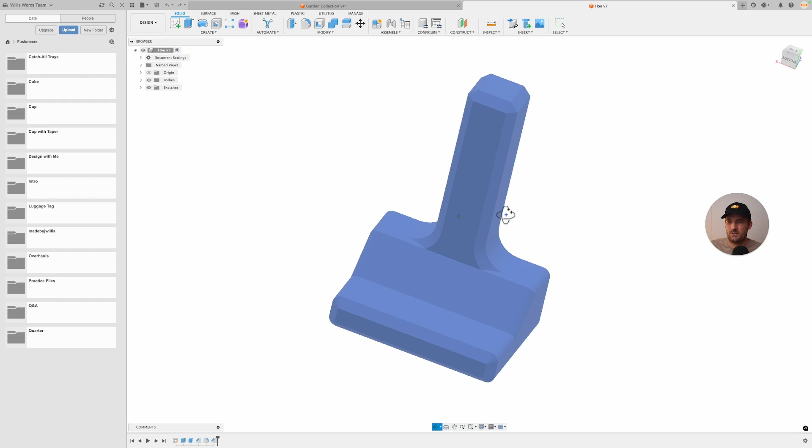Today we're going to be talking about how to design these garden hand tools. The first one we're going to design in this video is this hand hoe. So you can look at it from this perspective. It's optimized for 3D printing, which I'll talk about some as we design it, but this is what we'll be making, so let's go ahead and get started.

So if you've been following along with Fusioneers, this is our Fusioneers folder. So I'm going to go ahead and make a new folder, and it's going to say hand garden tools, and then open that up and then make a new file here. I'm going to do hand hoe. And so if you'll notice from the collection, these are pretty similar, really. We're just changing the kind of tool aspect of them.

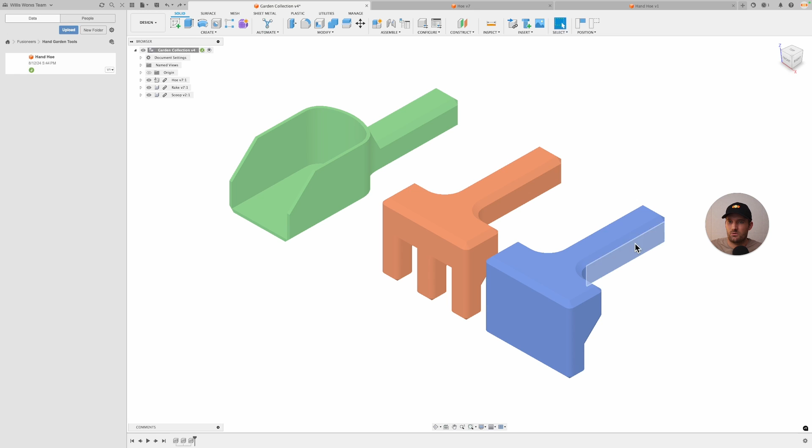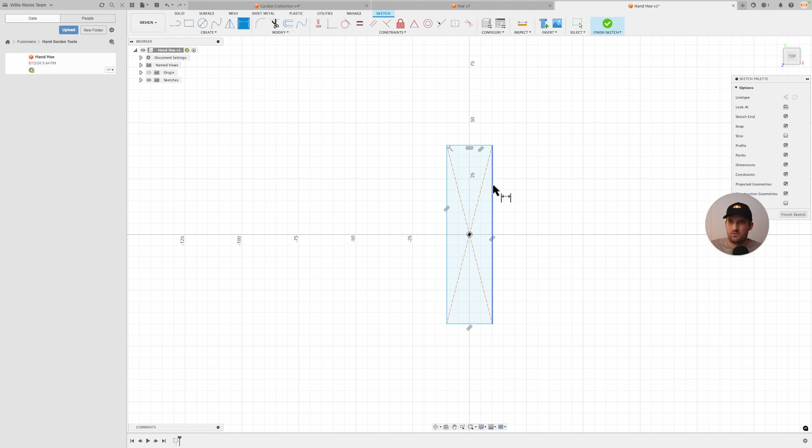So the first thing we need to do is to make a rectangle here. And I just need to remember how long I made this rectangle. So it's 110 millimeters from there to this flat surface. So let's go ahead and go back to the sketch, and then we'll start here. And we're going to create a rectangle. I'm just going to use the origin here. So it's 110 millimeters long. So I'm going to click D for dimension, make that 110.

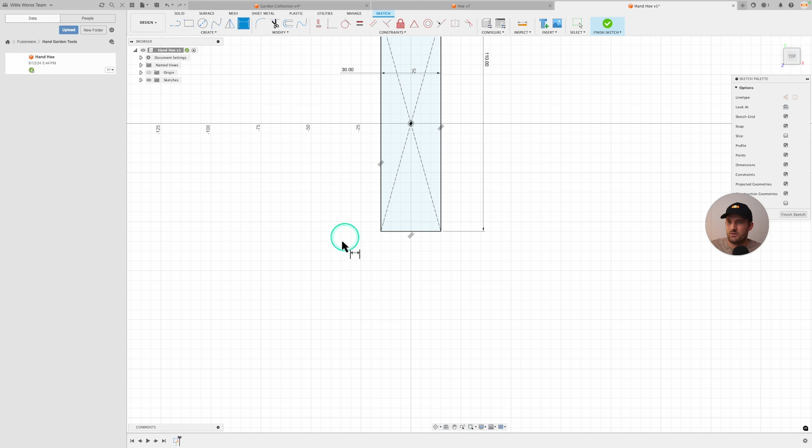And before I forget, I'll turn on my kind of highlighters here, and then I believe I made it 30 millimeters wide. Yeah, so 30 millimeters wide. So dimension with the D shortcut key, and then dimension it out to 30 millimeters. And then down here, we're going to make this using the R shortcut key, which is the 2-point rectangle. And then I think this is, maybe it's 40. Let's see. I'll need to go check that in a second as well.

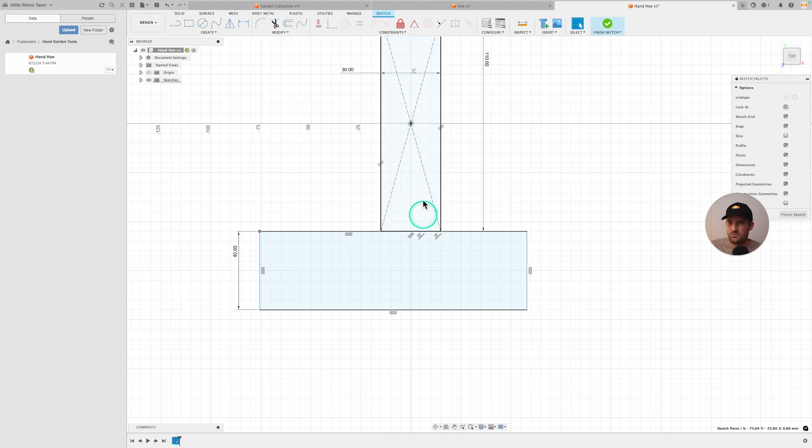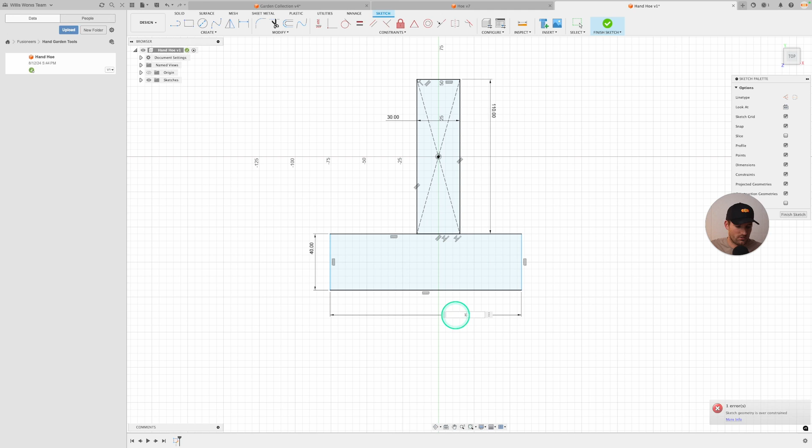We need to make this colinear with that line. And now the last thing to do is just to constrain it this way and also in space. So let's go back here to make sure that I do it the same as I did this one. And the reason I go back and forth is because I do a lot of guess and check when I'm making these. So this is 100 millimeters wide, and then let's see how thick it is. 40. Okay. So it's 40, we got that right. This is 100, 100. And then we want this in the center. So this is a little short.

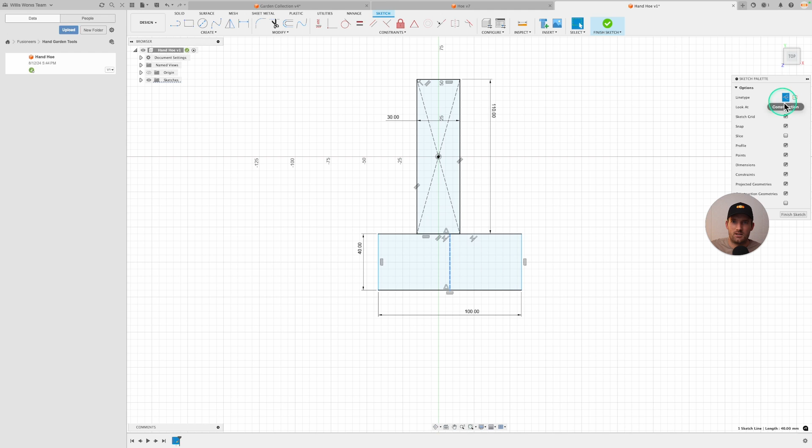This is a little trick that I like to do. If you just draw a straight line here, this is at the midpoint of these two lines. So now we know this is in the middle, and then we can make it a construction line by clicking on it and then click X, which is the construction line type. So it just alternates between construction and the regular line. And then you can select midpoint and then select this, and then click and hold, or you can make sure that the smaller rectangle line there is highlighted, and then it snaps to the midpoint of that. So now this is centered and symmetric on each side.

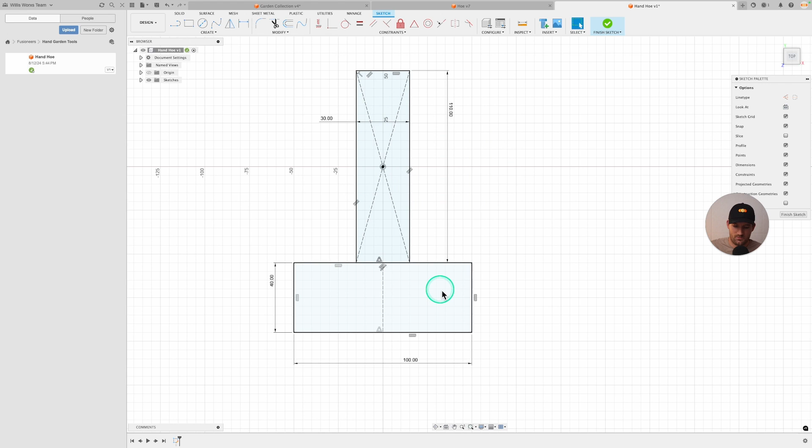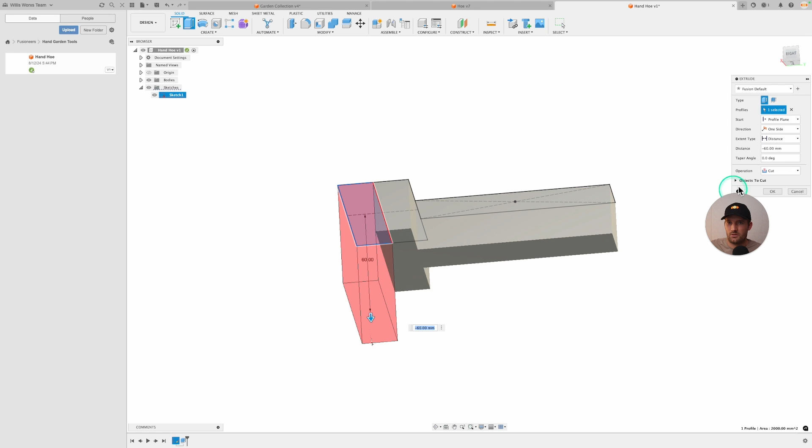Okay, so click finish sketch. That's all we're going to do for now. So actually we need to do one more thing. I forgot about this. So go back into the sketch, and then we're actually going to draw a straight line across the middle here. And that's going to be for our chamfer later. So now we can go ahead and extrude this out. So we're going to go -30. And then we're also going to go ahead and turn this back on and extrude this out a little bit further than 30. So we're going to click join. And then let's see, probably did about 70, so we need to check that as well. So it's 80 millimeters from there to there. So we just need to come back here, make sure we go 80 millimeters, so -80.

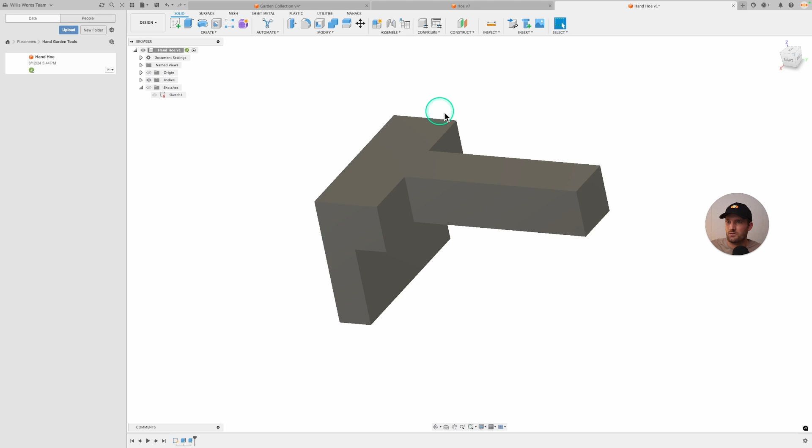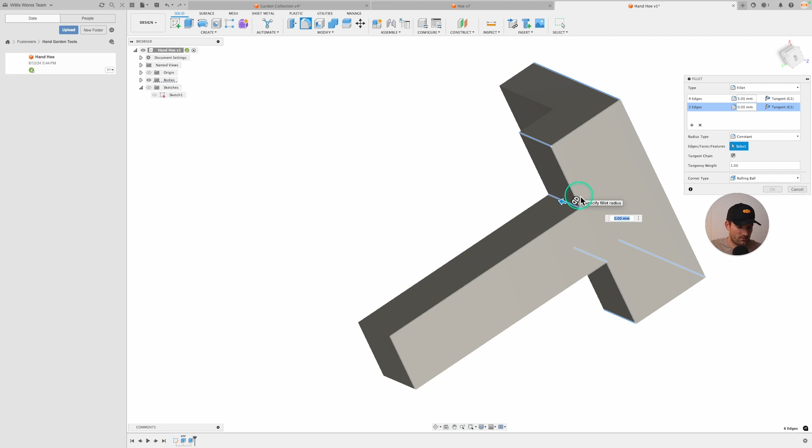Okay, and so this is the rough outline of it. Turn the sketch off, and now we can fillet the corners here. So this is going to be, I think I used 5 there. And then I might have used more in this corner, so I'm going to go ahead and add. And the reason I click add is this lets me make a different amount of fillet here. I want to say this one was maybe 15. So that looks pretty close. I'm going to click OK. And let's just check here before I go any further. So this one was 15. These were 5. So yeah, that looks pretty good.

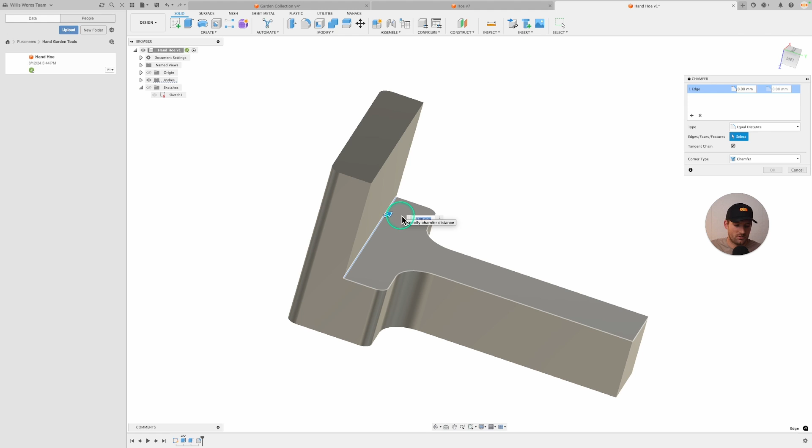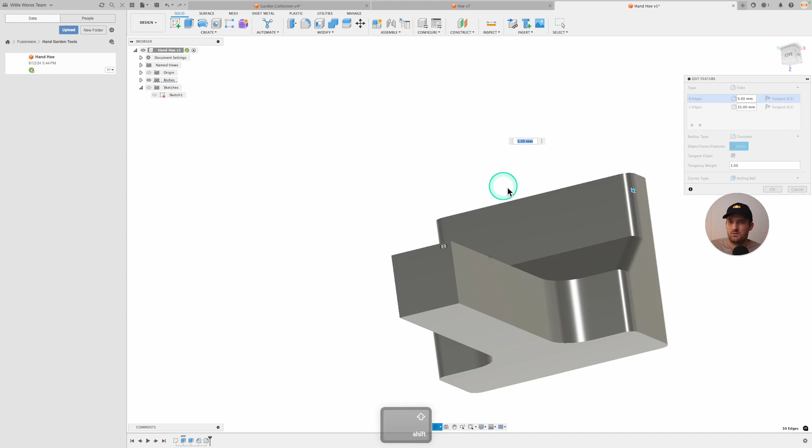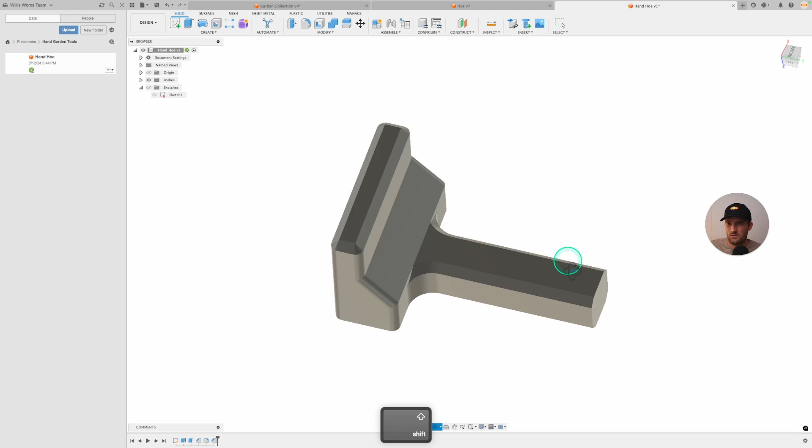Now we're just going to need to add this chamfer here. So modify chamfer, and then this is going to be 20 to make it all the way out there. And I actually want to go back in time here and then edit this feature. So now I'll put this behind. Actually, it's selecting the wrong one. So I want to make sure I have the 5 selected, and then that's going to fillet that, and then also this. And then click OK. And now we're going to do modify chamfer. And this is going to be 5 on each of these corners here, or edges. And so I think that's pretty close. Yes, we had that. Okay. So this is the hoe design.

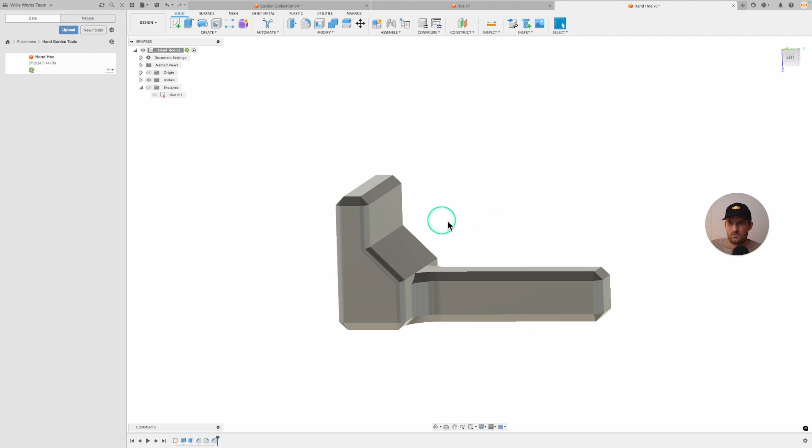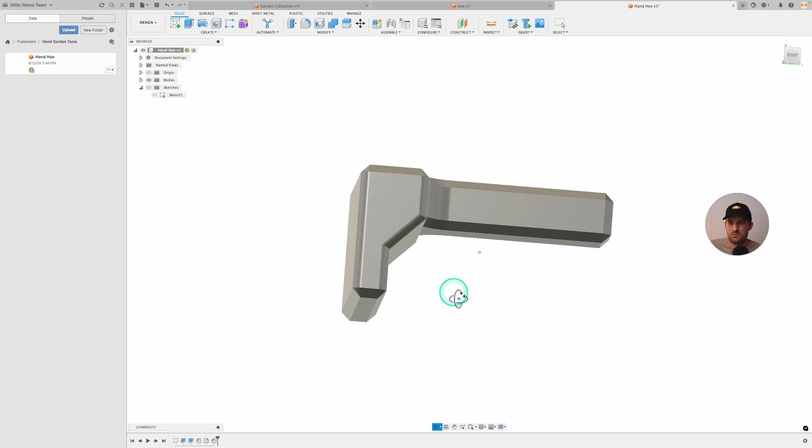One thing I did forget also is to just select this face, and that gives it a little nice end there. This is how I made the hoe, and the reason that I made it this way is obviously you could leave this off, but this gives it a lot of reinforcement. So if you're actually using this, this is a good practice file regardless of if you used it or not. But if you're using it, you can imagine there's a lot of kind of pressure or force here, and this really reinforces things. So this is just really for strength purposes. You could leave it off, but it'll create a pretty high stress point there in the 90-degree angle. So adding a chamfer like this really makes it a lot stronger. So this is the design.

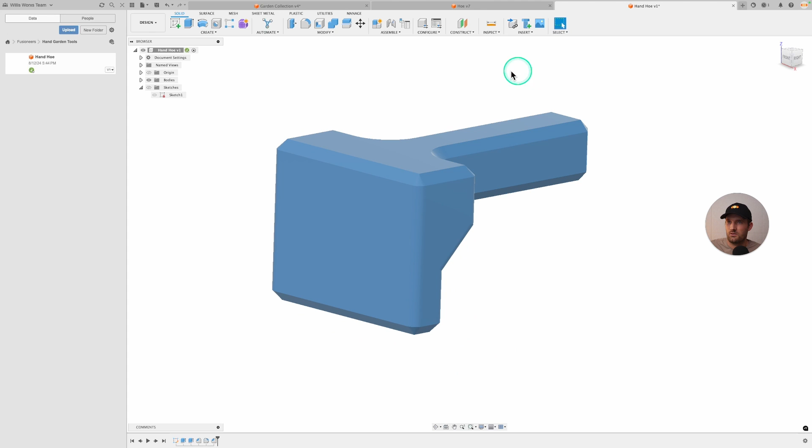So if we click A, you can go over to plastic and then select ABS, and then we can make this whatever color we want here. So make it kind of a similar color blue. And then now we have the file. So I think that those match up pretty well overall. And yeah, so that's what I wanted to show you all today. So hopefully that was helpful, and you can use these files if you want in your own garden, or modify it however you see fit.